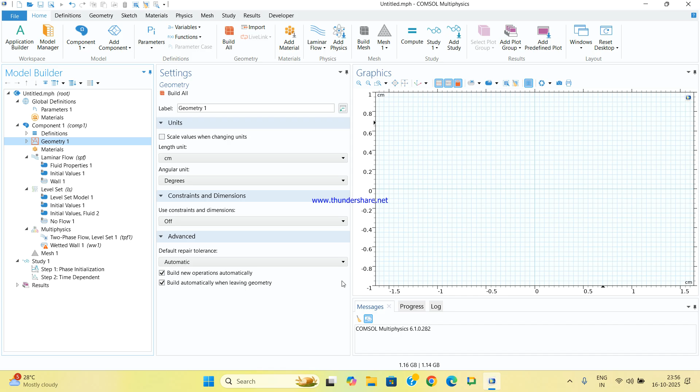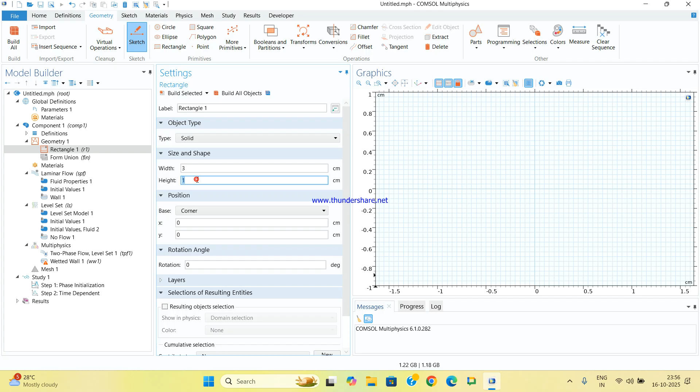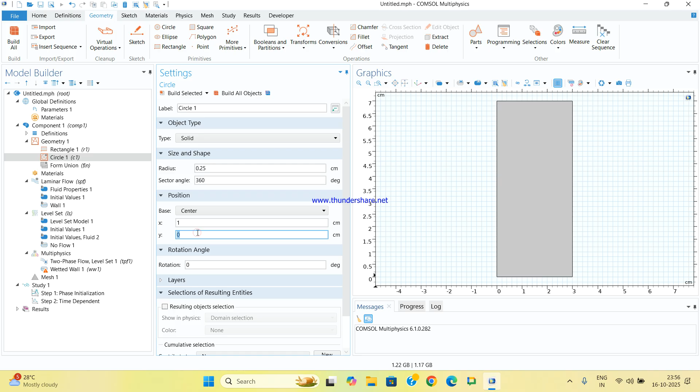Definitely we can do it with a 3D model, but in that case, when we'll be doing the actual problem, we'll be working in a cluster system so that the solution can converge quickly. Okay, so now I am going to the geometry, and I am taking a rectangle. Let the size be 3 by 7. Then arbitrarily I will be creating some oil droplets. Let the radius be 0.25, and it will be somewhere here. So this is one liquid, meaning the oil droplets.

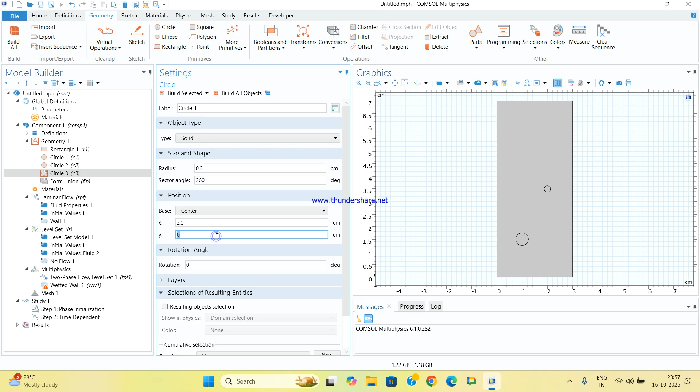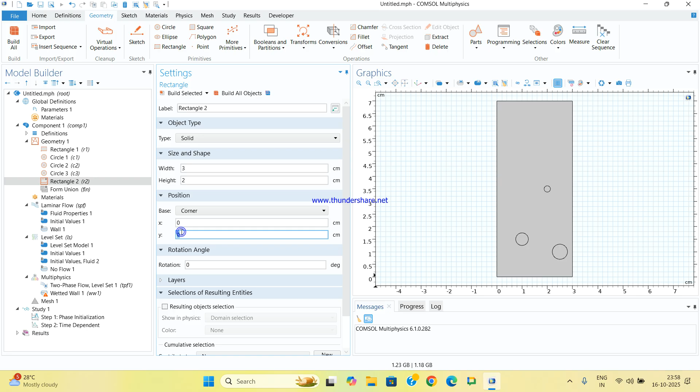Another we'll use, say 0.12, and this will be 2, and the y will be, say, 3.5. We'll use another one, say 0.3, and this will be at 2.5 and 1. So this I just arbitrarily took, and at the top there will be another layer of oil. The width I will take the same as 3, the height, say, 2, and the corner is 7. So this is my approximate geometry, or we'll take slightly less, let us take 1.5 or 1.

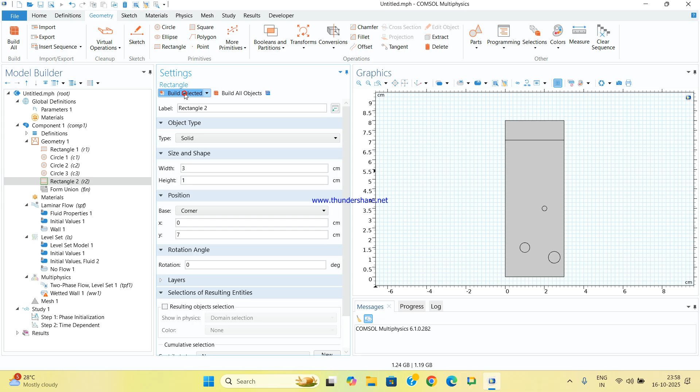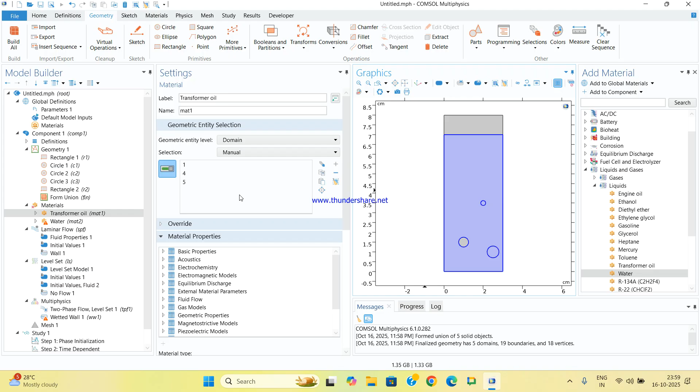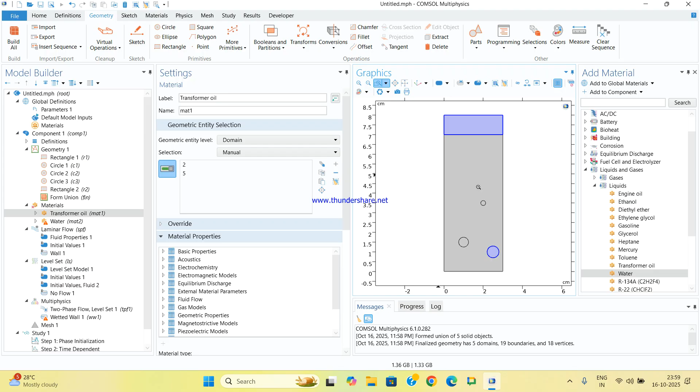Okay, now we'll add the material. We'll go to liquid and gas, and here it will be liquid, so we can take the material. This is transformer oil, and another we can take is water. Okay, so the transformer oil will be this, sorry, and this, another one, select this. Okay. So this is it, and this will be the water.

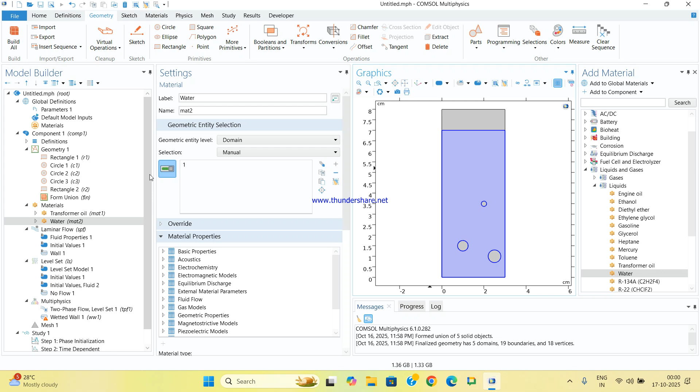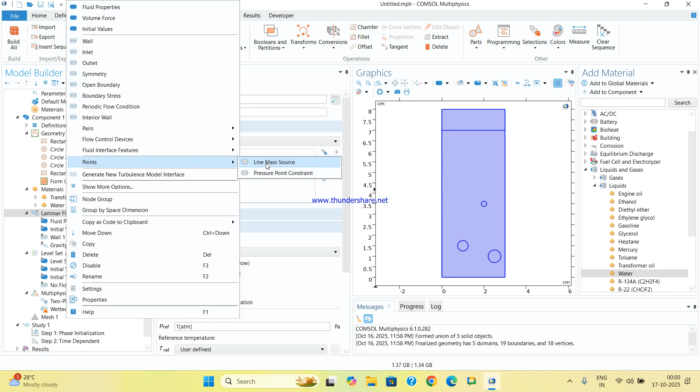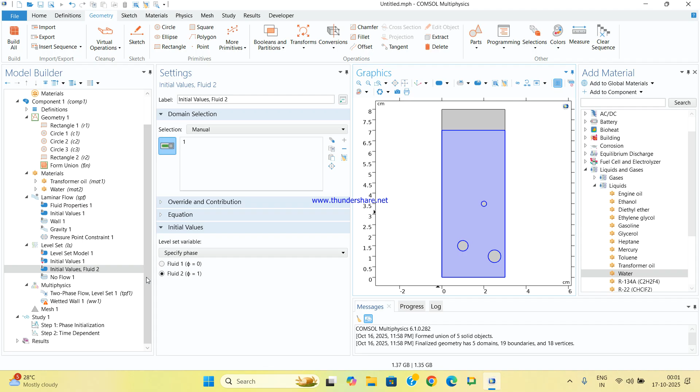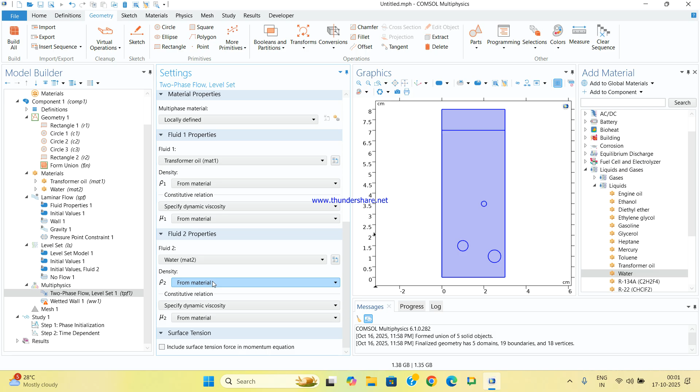Now in the laminar flow, here we will include gravity. And as there will be no inlet and outlet, we have to define one pressure point constraint, and I'm selecting this one. For the initial values, fluid 1 will be the oil, and fluid 2 will be the water. So this one is the water, and this will be the oil. And here fluid 1 will be the transformer oil, and fluid 2 will be the water. And the wetted wall, we'll consider this one. Now we'll go to the mesh.

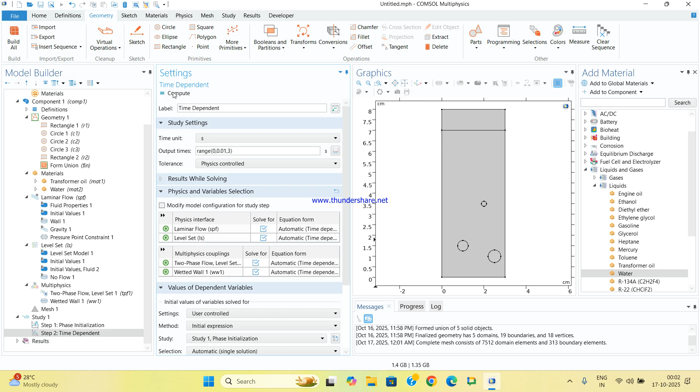And we'll go to the study. Let us do it for say 3 seconds, and let us see the result. Definitely it will take some time. As I told, here you see the degrees of freedom are around 15,000. And as you know, it's a transient analysis, so definitely this will take more time. So for the time being, I am pausing till the solution is obtained.

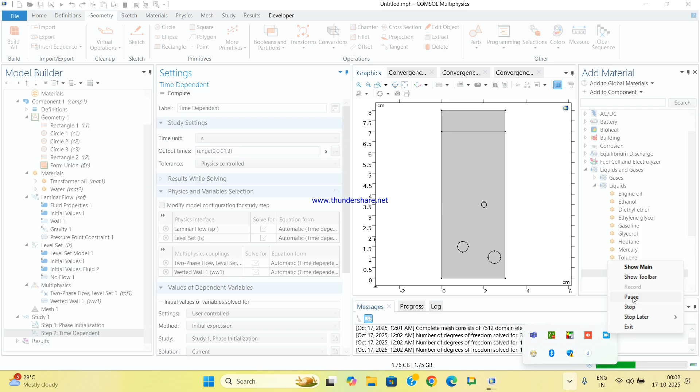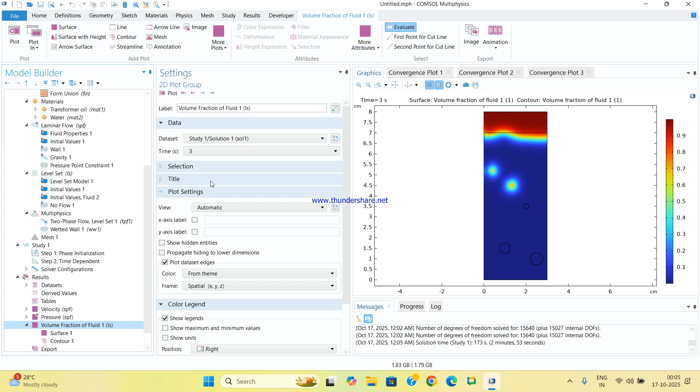Okay. So the solution converged, and using the animation tool, we'll see how, you see. We cannot see, it is very fast. So let us increase the frames and play again. Now you see the liquids, these are going, and finally it is. So if you increase the time, you can see how it will be moving.

So this is a very basic problem. I have shown you how to simulate water droplets. So instead of water, you can consider any medium like air, and the water droplets falling from the top and accumulating at the bottom. So how would it be? Which module is to be selected and how the boundary conditions are to be applied, I think you have understood that, and now you can do it on your own.